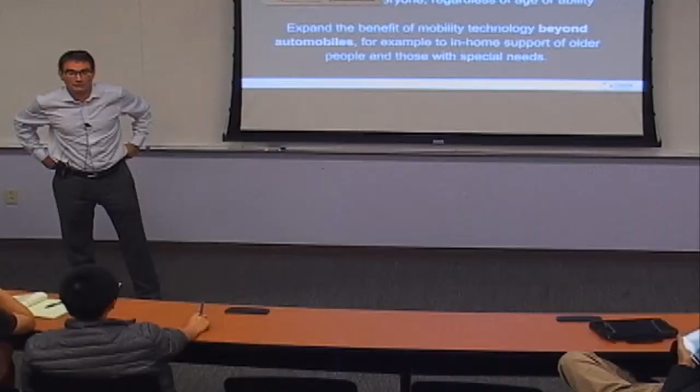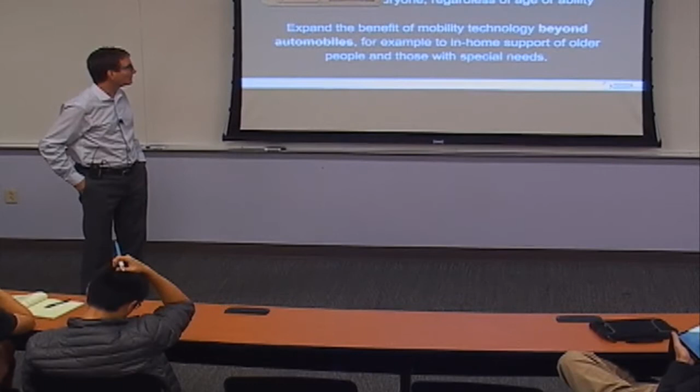We've already talked in many of our public presentations about what we're doing with driving. I'll give a tiny summary of that - it's kind of already out there. Gill Pratt and James Kuffner have done a great job of spreading the word. And we have not talked publicly about our robotics work until last Saturday, so I'm very pleased to come out here at Berkeley. This is not widely known yet.

Do I have a chart about TRI's history? Not really. That's the mission. We were funded with $1 billion, 10 to the 9th, for 5 years. And the goal was to become the DARPA of Toyota.

DARPA, the Defense Advanced Research Projects Agency, has been extremely successful through 5 decades now of being revolutionary and disruptive. DARPA brought us the Saturn V rocket, which took us to the moon, and GPS. My particular part when I was a DARPA program manager was the robots used to defuse roadside bombs in Afghanistan and Iraq, the PackBot and the Talon. What else has DARPA done? Well, most recently the DARPA Robotics Challenge was motivated by the Fukushima incident in Japan. And the internet was the ARPANET and the DARPANET before it was the internet. There's also the very fancy prosthetic arm that Colonel Ling did.

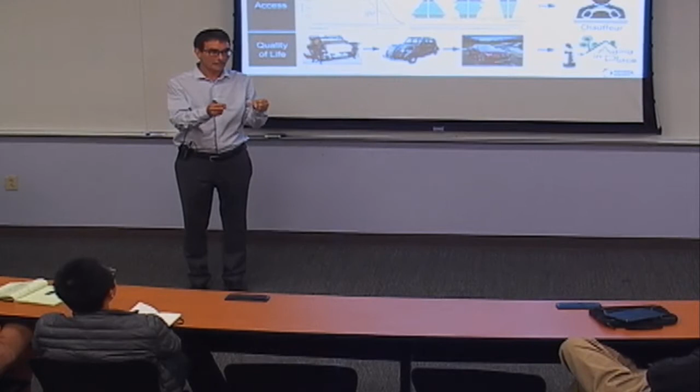Safety: lots and lots of casualties and deaths due to accidents. We have one main approach here, iconized as Guardian. In Guardian, the idea is that the person drives, and there's a system watching, like your guardian angel, watching over your shoulder. If you're about to do something dumb or dangerous, it will warn you.

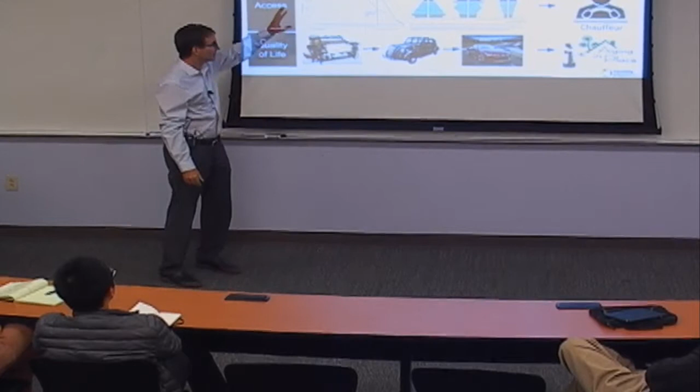And if you're really about to do something dumb, it will take over and help you and save you. The other approach, called Chauffeur, is what you classically think of as a self-driving car. You're reading the paper with your hands behind your head, maybe not paying attention, and the car is driving itself.

So there's a strong motivation for that: allowing a system that can drive when you're disabled or older. An aging society is going to be a huge problem, first for Japan, then China, then United States and Europe. It's a wave that you can see coming.

1960, 2010, 2060. This side is male, this side female, and these are the numbers of people at different ages. You can see it's bulging where there are more and more. The greater proportion of society is old.

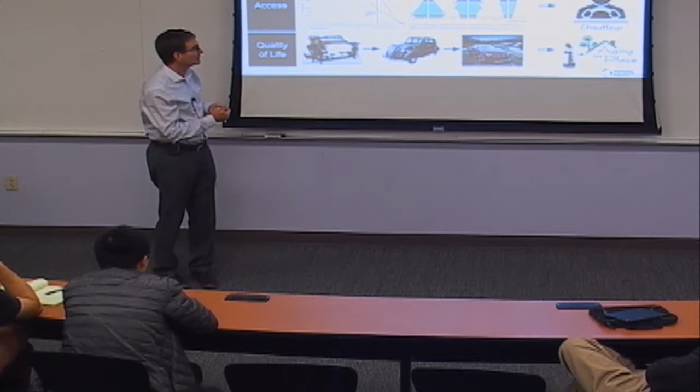These people are older and they're less able to move, but they don't have less of a need to move, right? They're not just going to stay where they are. So they're going to need transportation help, and Chauffeur is going to help meet that need. So safety, access—I'm going to talk about this more poetically in a slightly later chart.

Okay, this one's out of order. I already told you about the background here. So that's our CEO. I started in January of '16 as the chief operating officer, just getting the company up and running. Then we brought in a real professional from Lyft, who was their chief operating officer. And James Kuffner was a professor at CMU, then went to Google.

He's the person who coined the phrase cloud robotics. He went on to write the planner that did the Larry 1K, which was the first Google self-driving vehicle that drove 1,000 miles in the Bay Area.

And Kohaya-san is our liaison. 20% of our workforce is native Japanese, basically Toyota employees who are loaned to TRI. This is our transition path—how we get the technology, our inventions, and our practices from the United States into big Toyota.

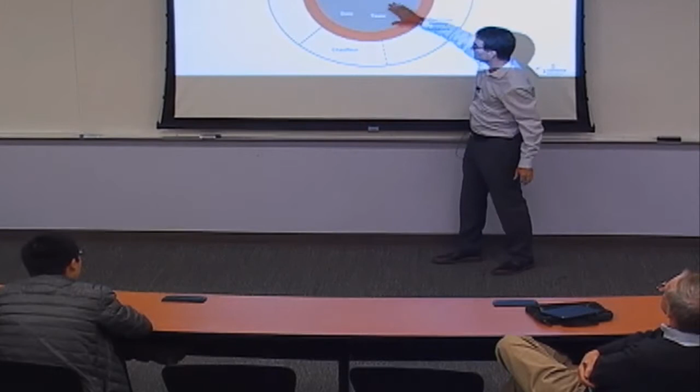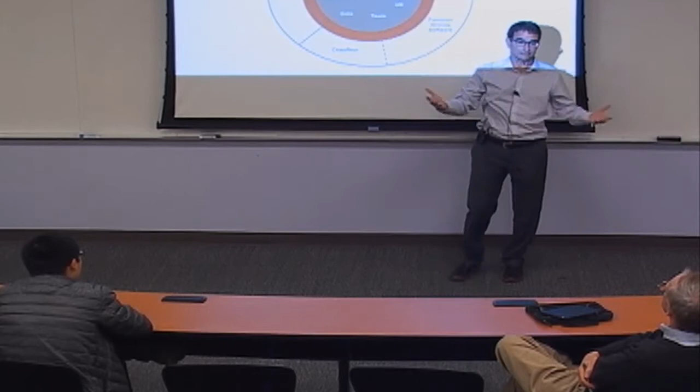What is the human in the car going to do? What is the human pedestrian going to do? All of this kind of prediction—that's all in this common core piece. I'm responsible for our robotics effort, our materials discovery effort, and this red thing, the university efforts at Stanford, Michigan, and MIT. There's some core technologies that are equally applicable to all of the application areas.

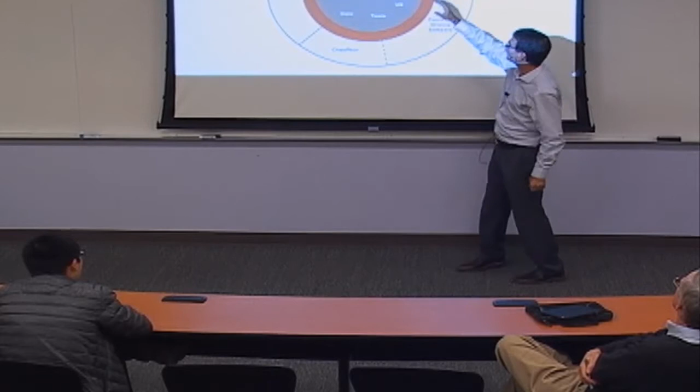James is responsible for those. For example, in learning, we're using learning in all three of the areas. So we have our own—I wouldn't call it basic research, it's not 6.1 research investigating basic principles—but we have a lot of people messing with learning systems, just trying to make them better, independent of applying them to driving, robotics, or materials.

That's a very unusual setup, but TRI is a little unusual, I think.

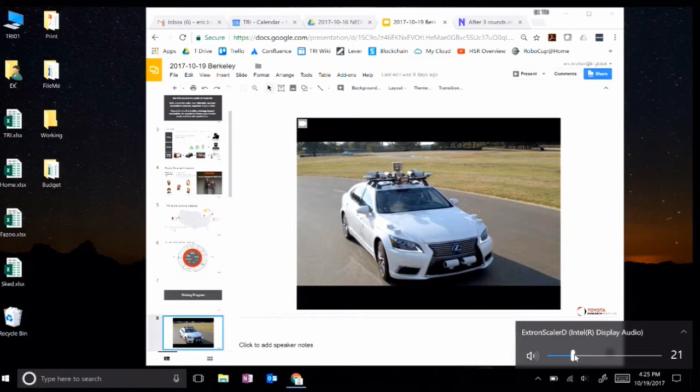Today you're going to see 4 different demonstrations. The first 2 of them are going to be in chauffeur mode. What chauffeur means is that the car drives for you. You would use a chauffeur car if you can't drive, for instance if you're disabled, if you don't want to drive, or if the traffic is very bad.

Can anyone still hear? I'm sorry to do that to you.

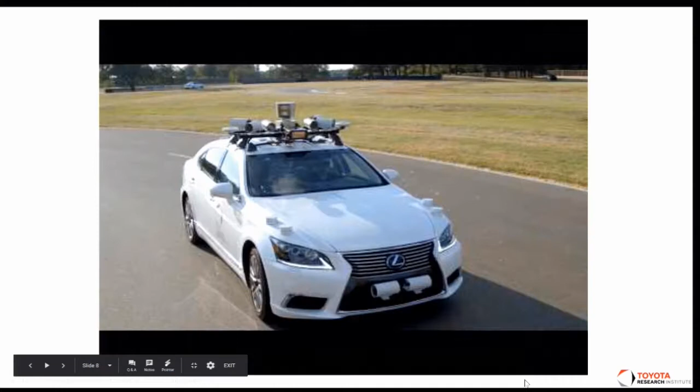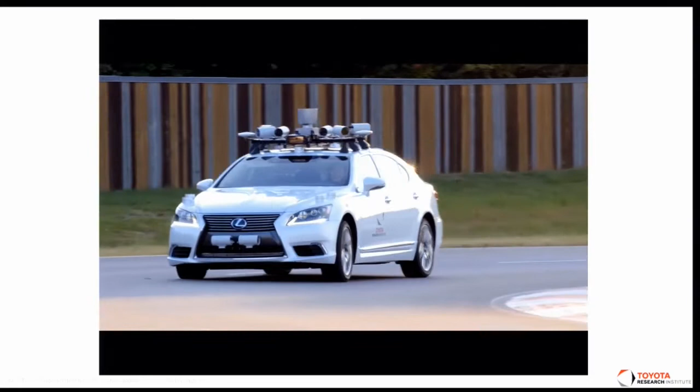Today you're going to see 4 different demonstrations. The first 2 of them are going to be in chauffeur mode. Oh, you're going to know the beginning of this by heart.

Today you're going to see 4 different demonstrations. The first 2 of them are going to be in chauffeur mode. What chauffeur means is that the car drives for you. You would use a chauffeur car if you can't drive, for instance if you're disabled, if you don't want to drive, if the traffic is very bad, or if you're taking a taxi cab ride, like mobility as a service.

The other 2 demonstrations are going to be in Guardian mode. This is for people who want to drive. It's a safety net against having a crash. We have designed a special test car which has dual steering wheels, dual brakes, and dual accelerators.

The reason for this is that we need two different personnel in the front of the car. One is a safety driver, the other is a test driver. They are there to interact with the car as if they're the actual driver in a production car. But for our development, this is a tremendous advance because it lets us test the Guardian system with an actual test driver while still having a safety driver there just in case.

We're going to start off with the chauffeur mode of the car, where the car is going to be doing all the driving for us. So you can basically sit back, relax, and enjoy the ride.

All right, you ready, Sharon? Yes, I'm ready. Are you ready, Aaron? I'm ready. Okay, here we go.

One of the real world things that we have to handle in self-driving mode is all the randomness that occurs every day. In this lab, we're recreating a scenario where a pickup truck has driven along the track and dumped some hay bales out of the back randomly. What you're going to see is our car senses, does a safe lane change, senses the next one, and then changes back. Very smooth.

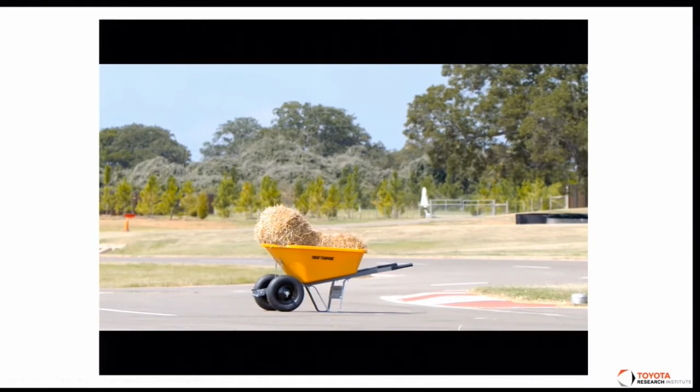And now Guardian has stepped in, it's driving the car for you, and now it will offer at some point to give it back to you. Why don't you go ahead and take it now.

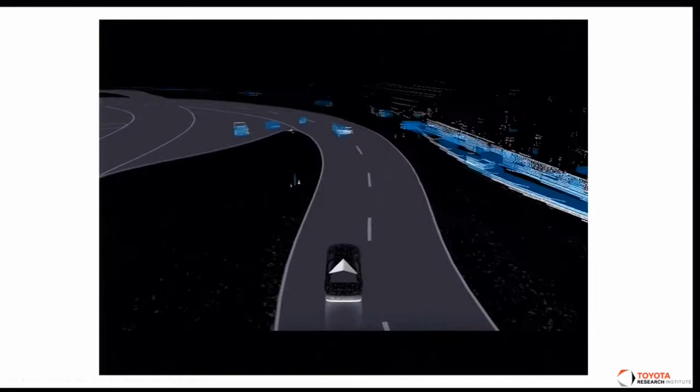One of the most frightening things that can happen on the highway is when a car in front of you switches lanes to avoid debris. You have very little time to react because your view is blocked by the car in front of you. We have sensors that can see significantly better than a human driver can see. The Guardian is going to take over where a car switches lanes in front of us in order to avoid debris. Here that car switches lanes, Guardian decides we have to switch lanes also, and we avoid having a crash.

Now Guardian has offered to hand back control, and Ryan has taken control back of the car. So today you've seen demonstrations of two basic technologies that the Toyota Research Institute is doing research on. This is all part of TRI's work to eventually build a car that can never be responsible for a crash, regardless of what the driver does.

So we did all of that a couple of weeks ago, and Akio Toyoda, the president and CEO, was one of the guys on the second steering wheel. All of our board of directors and biggest investors all had a chance to do it. So I'm happy to.

This is at the Gazoo closed course in Texas.

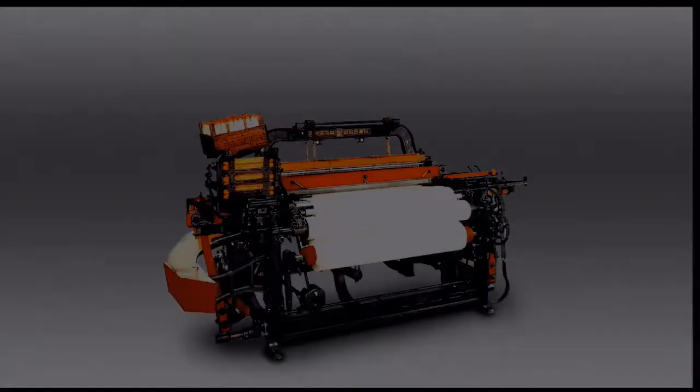So, gulp, this is getting real. 10 million cars a year. The way you usually launch things is you put it in your flagship car, for us the Lexus, that's sort of the premium thing. And then a few years later it gets into the Camry, and a few years after that it comes into the Corolla. So it's not 10 million right away, but that's our charter.

So that's kind of a snapshot of what's been going on. Let me focus now on robotics, which is something that I'm more directly involved with.

Toyota started as a textile machinery company. It made looms, they were the best looms. They were able to sense when it dropped a stitch. Other looms would make an error and then keep going, and then you're done - you look at it and say, I dropped a stitch. And the Toyota loom would detect it and stop, and someone would run out, fix it, and then start it all up again.

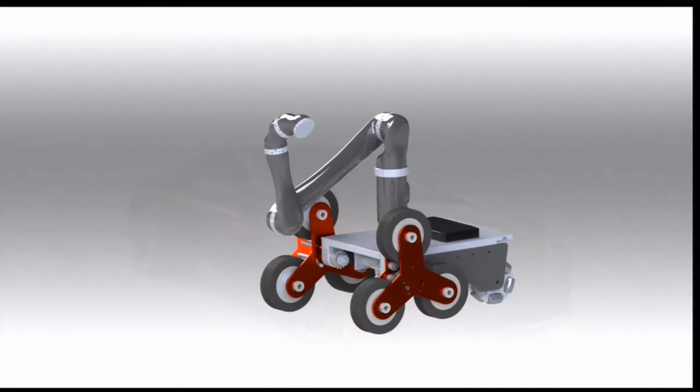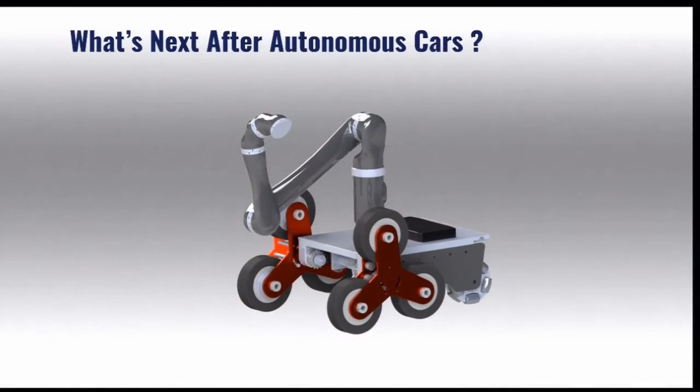And the question that TRI - that's all TMC - it seems likely that we're going to sell fewer cars in the future with mobility as a service and ride sharing and an aging society, less people buying and owning cars. So what's Toyota going to do? What's the next pivot? We went from textile to car to robots is what TRI's hypothesis is, and we're working to make it possible for Toyota. It seems like every generation of the Toyota family wants the company to pivot a little bit. So this would be the legacy for Akio Toyoda.

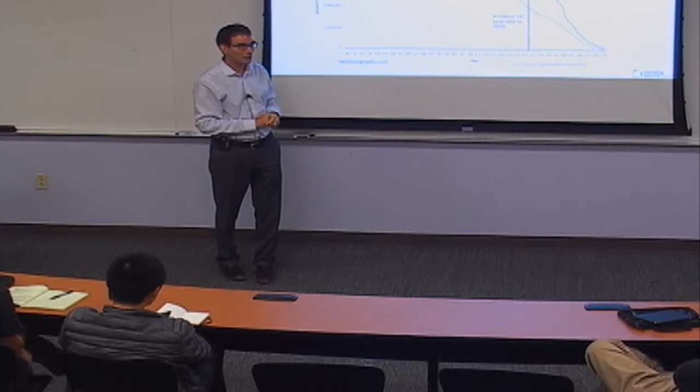And we want to get our cars out in a few years, 2020. The robotics can wait a little longer. This crisis is slowly happening, but we have a little more time. And I think it's more like a 5 to 10 year horizon is when I would like to be able to stick my finger in the dike and hold back the flood of aging a little bit.

One of the key approaches we have for doing this is simulation. Google and Berkeley's Sergey Levine has his arm farm - well, we've got a virtual arm farm. And what TRI has is the world's best simulator now, called Drake. It's open source. We haven't officially launched it yet.

All these robots are exactly the same robot doing exactly the same task, picking up that blue thing. They drop it, it goes into some random orientation, they try to pick it up again. This is running up in the cloud, lots and lots of robots, many, many samples, and we then study the errors and the distributions, find the statistics of the failure distributions. Then you know what's going wrong, you fix that problem, and then try it on physical robots.

A physical robot is never exactly the same as the simulated one. Update your models from the physical robots and plug that back in. Every time, we have a real modern software approach to this, so that when you find a problem - it wasn't able to pick up the blue funnel thing in such and such orientation and starting configuration - then we put that into the testing. When we do our continuous integration, we build our software every night, and it's got to pass that test before we promote that software to our master branch.

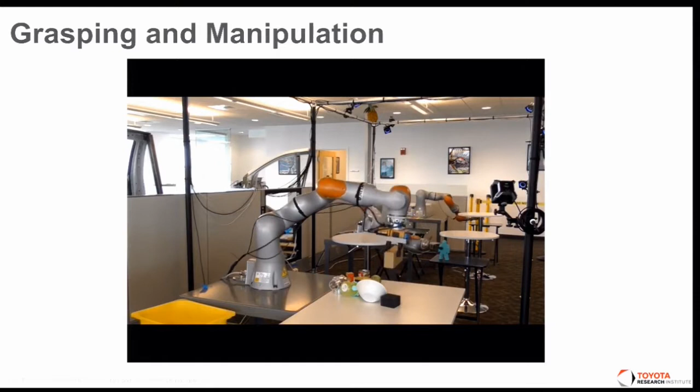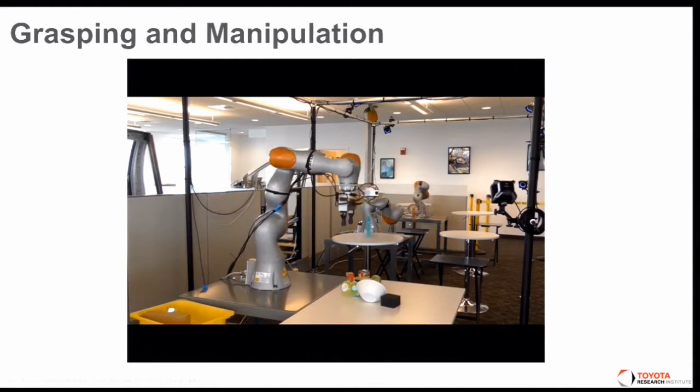So we're not just doing things in simulation - here is our new facility in Cambridge. I saw some demonstrations here similar to this. This robot in the foreground has an RGBD sensor. It does a pass like that over the pile. It doesn't have any models, doesn't know any of those objects. It just makes a point cloud, segments the point cloud, finds something on top, and then tries to approach it and pick it up. It doesn't always work, and it doesn't always put it in the yellow bucket the way it should.

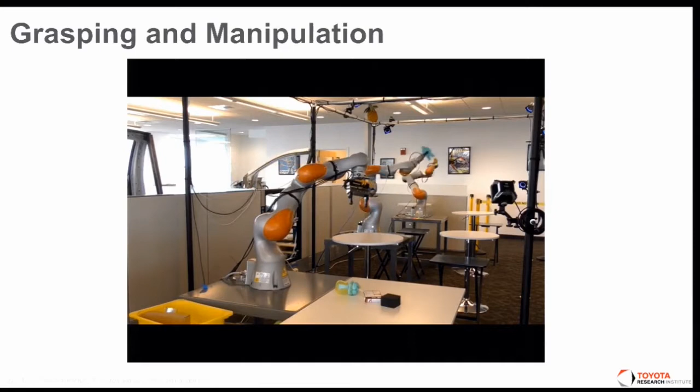Are you guys emotionally against models? Not at all - this uses models of the robot, but it doesn't require models of the object. We're not against it in principle. We've scanned all those objects, and we also have systems that try to do the point cloud and segment out specific objects, recognize them, and then it's object 14 - I know that behavior 37 is the one I should use for that object.

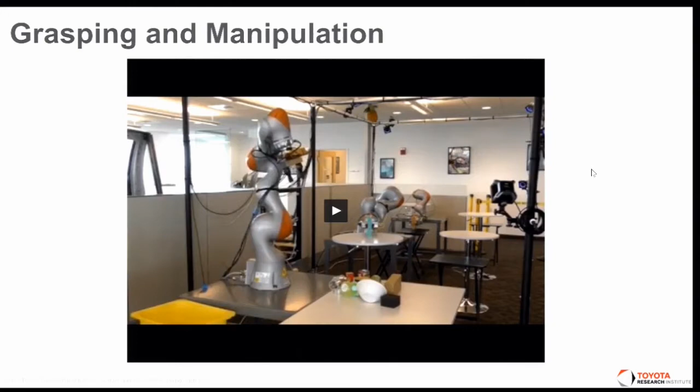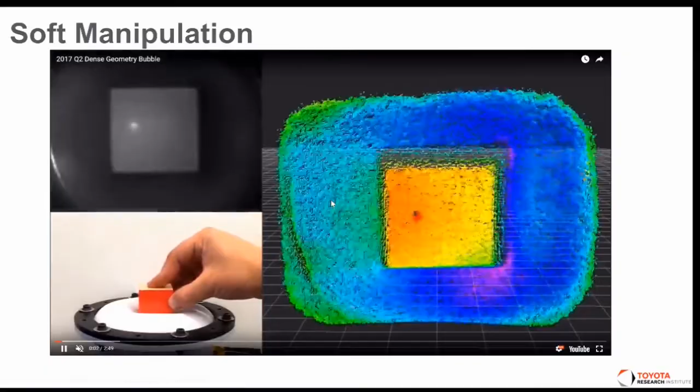Ken Goldberg, I'm sure he showed you, he has this big cloud, and the robots in back here were doing pick and place - so the simulation and reality together. That's not the one - that's not what I thought I was going to show, but here it is.

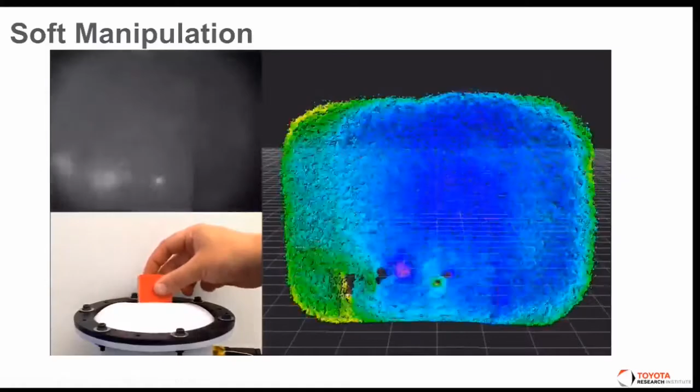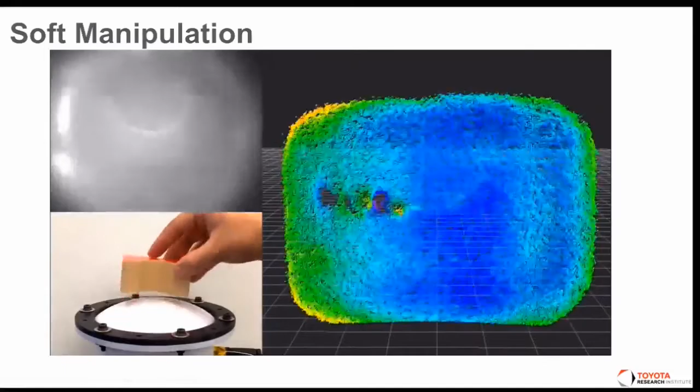We're also doing research on soft sensors. So this is a foamy piece of plastic. There's a range sensor underneath it looking up, and here is the image that it has, and we're able to analyze that and find the shape and the orientation of that object.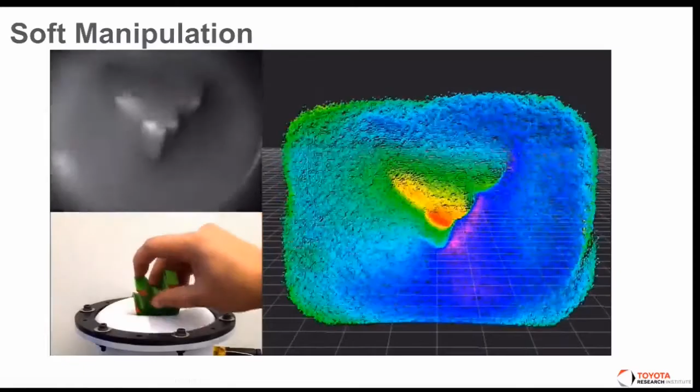Caroline, did you show him what you have? We have similar systems. Good - ours is better. I am sure, because we do it on $5,000. You are doing it on $50,000. That's a big difference.

Yeah, she had a chance to see this herself when she came to RSS in Cambridge. I didn't get to see it. I read too late. Oh, okay. It's cool.

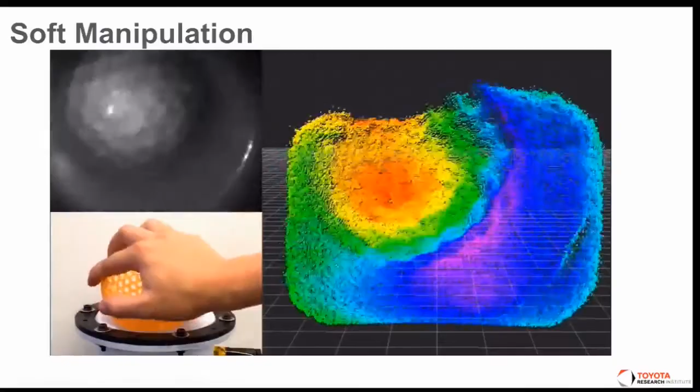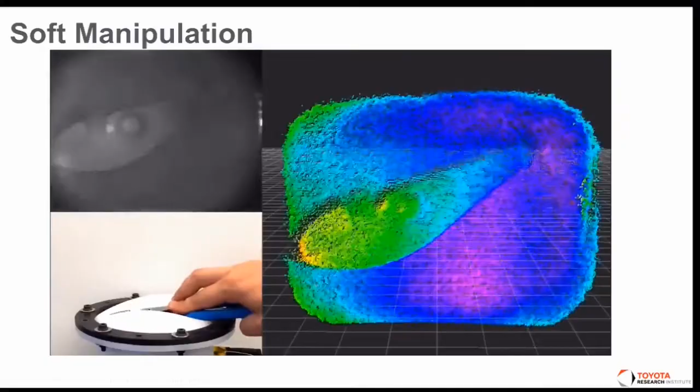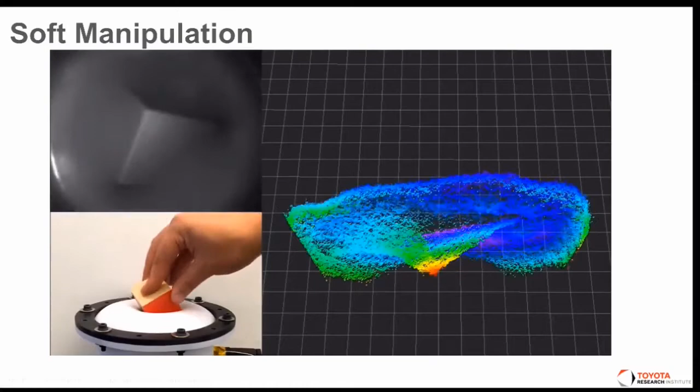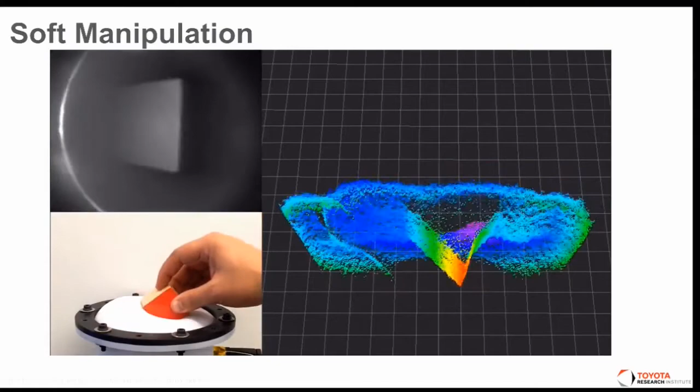The project now is to miniaturize that and put it on fingertips, and the sensing part of it. You can make very low-cost sensors like that, but the minimum range is the limitation - they all have an offset of centimeters, and that's not going to work in the fingertip. Ultimately, we want to cover the whole body with that kind of skin and be able to blindly touch, bump into things, be aware of them, and not have that be an error condition. It's just another way to interact with the object.

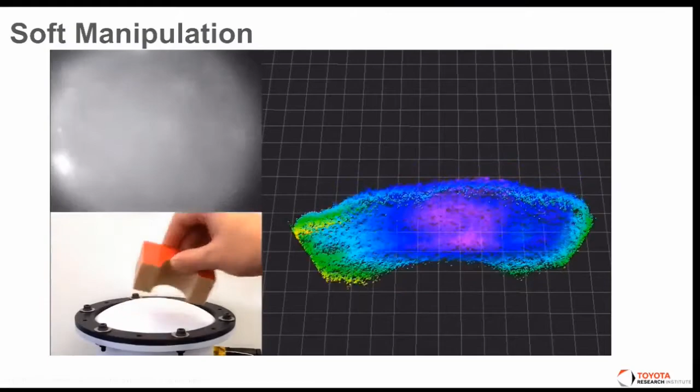So there's a group of maybe 3 people in our Cambridge office developing these sensors and working in simulation, pretending that we have a small one and decorating the body and the arm and the torso with all of them, and figuring out how to close feedback loops around that.

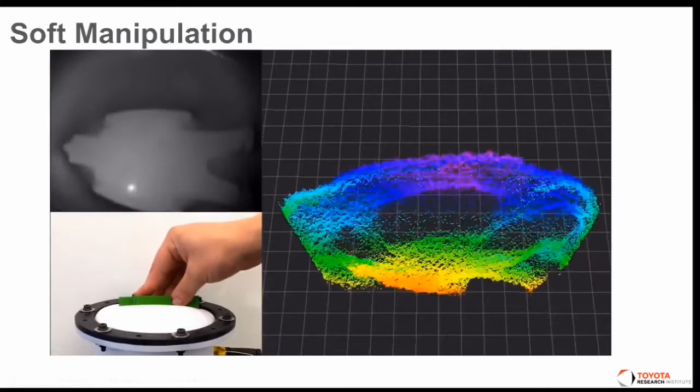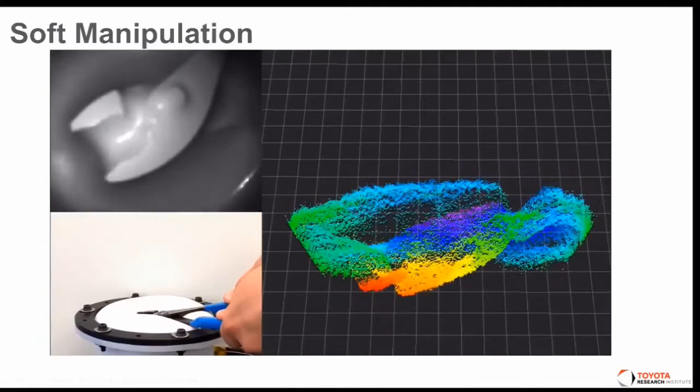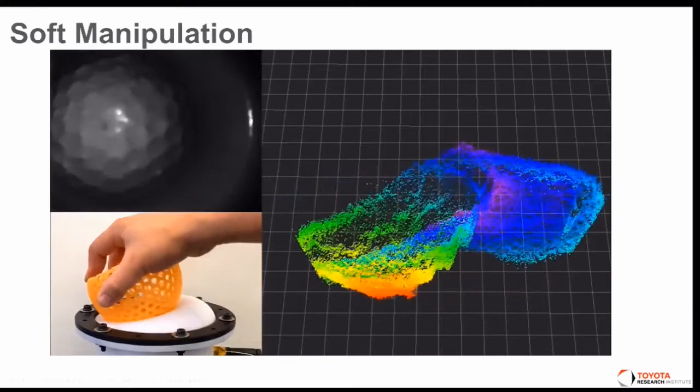It's not just tactile, right? It's really dense geometry that we're getting out of this - not just a few points of tactile. In a sense, you get the whole pressure distribution, the forces spread over the entire contact area. And it's not obvious how to use that in grasping and manipulation - it's a much higher dimensional feedback loop.

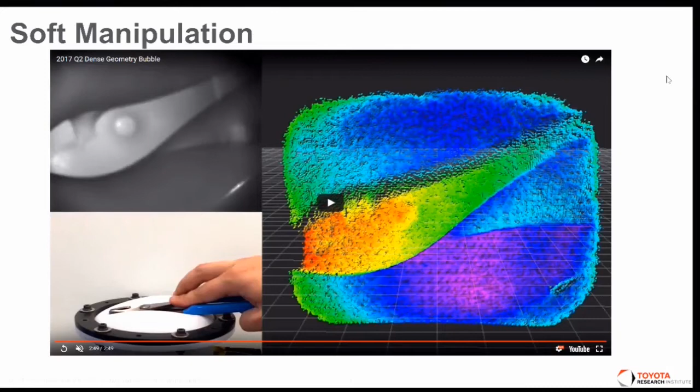I cannot resist to say, you remember the Toulouse finger? Ideas were there, I'm talking about folks in the 70s, and Eric actually spent some time in Toulouse working with these people. We had this, I hate to say this, it was called the French finger, but it looked like a penis. Unmistakable.

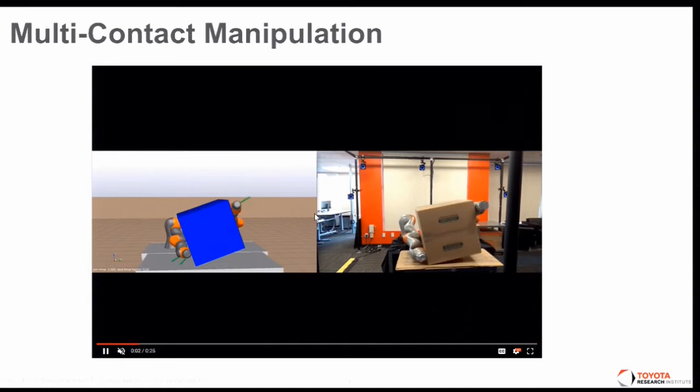Here's another case where usually when the rest of your hand or arm hits something, that's an error. Here's the simulation in Drake, and here's reality, with the guy walking by to show it's all in real time. You'll notice very good agreement between the simulation and the physical manipulation, and you can see the little force vectors coming out. I'll play it again since it's short.

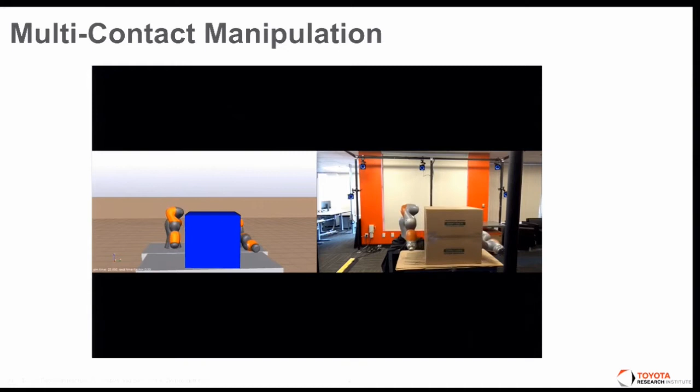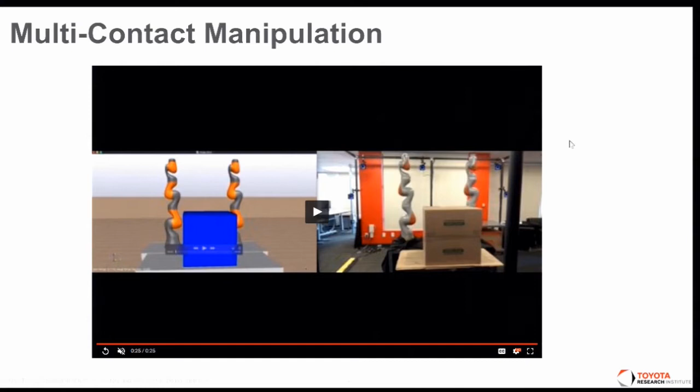The idea of whole body manipulation and multiple contacts, we relish that now. It's not something to be avoided, and actually the more contact you have, the more stable the entire system can be, and you can sort of hug things. This is a direction, and for interacting with people in the home, we think this is going to be very important.

Another area we're researching is manufacturing. I've been to many car manufacturing plants, and we looked at what people were doing and how we could help them be more effective and safer. Assembly seemed the most promising, so we're now applying robots to help assemble different pieces of the car.

Here's two guys putting this rubber weather strip into a window frame. You have to hold it up there and scoot your fingers in, like this. It's kind of an awkward thing to do, and it takes two people with two arms each.

There are lots of ways to cheat this, which we've been having fun exploring, like heating the weather strip and letting the elasticity of the material work for you, so you don't have to push it up and wedge it in as hard. It kind of naturally does that, and as it cools, it sets in place.

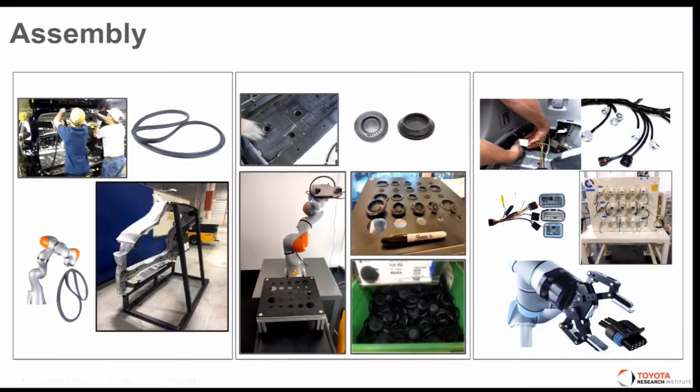We're coming up with different end effectors, like something that vibrates it into place instead of doing what a person would do. Another problem: when you manufacture the chassis, there are holes you have to plug up, otherwise water gets in. So we've made a fixture and now have the robot plugging the plugs in. Some holes are very hard to reach, which makes it awkward and causes back and thumb injuries.

Cable harnesses are also a huge problem, very awkward, and there's lots of them. Mating a plug and a receptacle sounds very simple, but it's a lot harder than plugging into a 3-prong outlet. So those are some of the manufacturing tasks we're taking on.

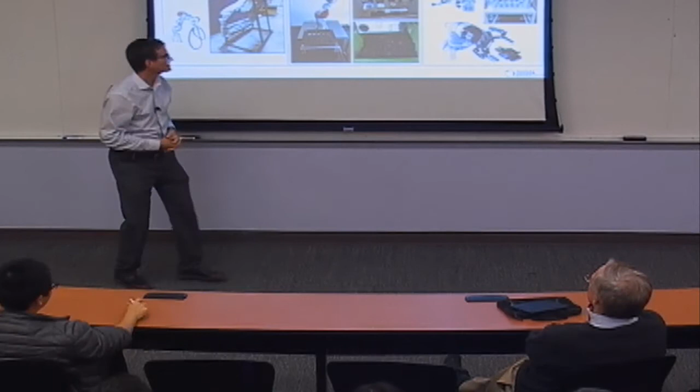If this is a bar chart, home is like this and factory is like this - this is a much bigger problem, and we're putting more of our resources on it. Assembly is kind of like, we can't be part of a car company and not do something for car manufacturing.

That's what I wanted to tell you about our robotics program, and I'm going to switch now to talk about the university program just a tiny bit.

So those are the three institutions. We have something like 45 projects, probably 50 or 60 faculty PIs, and 100 or more grad students and postdocs working on projects. For each one, there is a TRI liaison who is essentially part of their lab, attending lab meetings. At our next big workshop meeting, where all three universities get together with us, we're going to make our TRI people give the PI's talk - we'll see how that goes. And the papers are starting to just pour out.

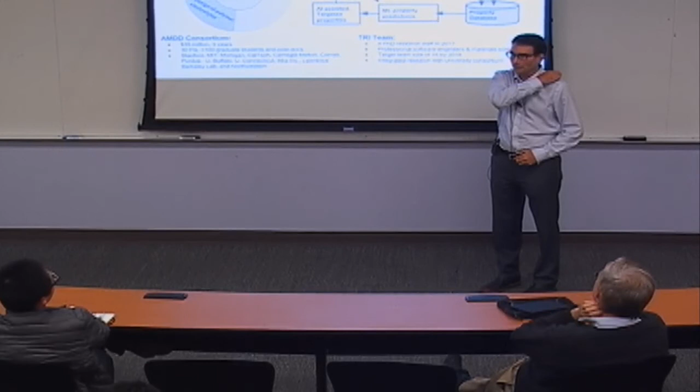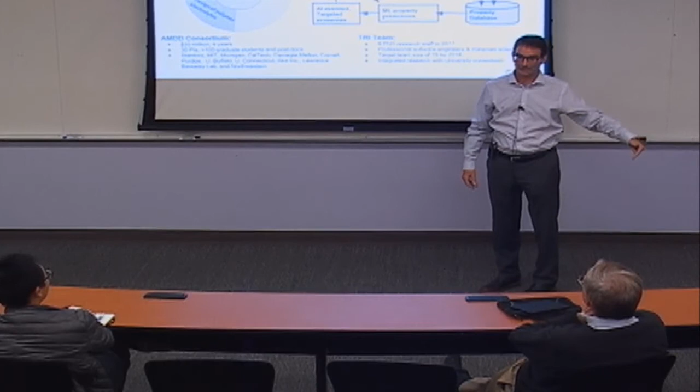I don't think the chauffeur and guardian framework applies that well to a home robot. There is sort of a layer of supervisory control. You could imagine I'm your home robot and you've asked me to put away the groceries, and I'm starting to do that. The rest of the house has a network of sensors and recognizes - the robot doesn't know it, but the house does - oh boy, the Cub Scouts troop is coming in, and they're all going for the kitchen because it's snack time. So robot, disappear, get out of their way. So there are higher levels of control that you could think of as like guardian, watching over the robot and alerting it to things that it's not aware of.

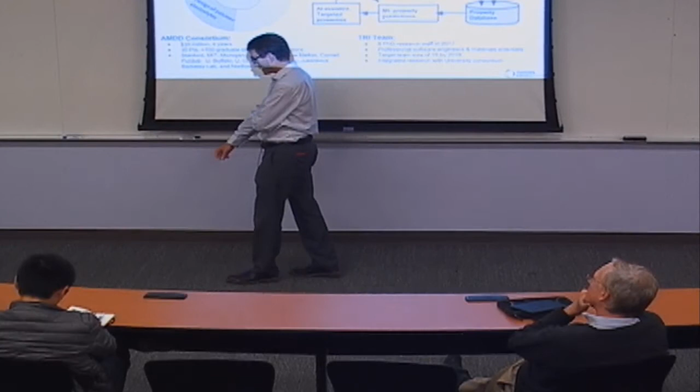Yeah, I don't think my question was really that those two paradigms apply particularly well to home robots. I was just curious whether you had any similar intuition for when these systems actually reach people's homes. There's this idea of Rosie the robot comes in and cleans up your house, and we have these cartoon versions of what that looks like. But I was curious whether you had any intuition for what those robots in their first iteration would actually start to look like, what tasks they'd be able to handle, and whether there are any nice abstractions you could draw.

I can't talk about all the proprietary details, but the activities of daily living—bathing, toileting, grooming, dressing—is one thing people all over the world do. And the instrumental activities of daily living, where you use the telephone, computer, vacuum cleaner, blender, refrigerator, those instruments to get a job done. That's the class of task we think we could do in a few years with modern robot technology, and manipulation is a key part of that. We're not going to get into the conversational agent, a better Siri or Google Home or Alexa. They're doing great, and we need that. But things that can really do work, applying forces and torques on the environment, I think is where we're really headed.

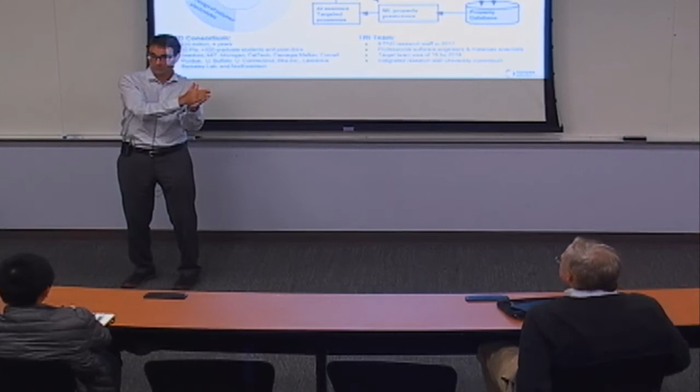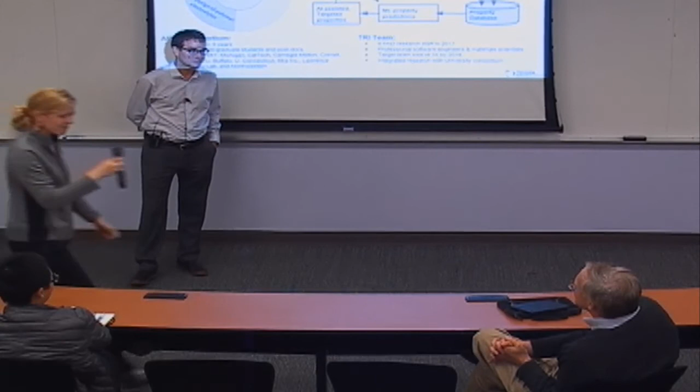I'd go highway teammate rather than urban teammate. I'm advocating this—this is just Eric's view, don't say this is Toyota's plan. Eric's idea is we would have the home teammate in the late 2020s.

There was a question. Thanks very much. Can I ask why that type of gripper? It doesn't seem like it's going to be well suited for the home—I'm going to have trouble with a doorknob, for example.

Yeah, the parallel jaw gripper, right. We have families of grippers. These are just the simplest ones that were already instrumented with the iiwa arms we were using. There's the Robotiq 3-fingered one, and an old iRobot design. So we're using them, just not shown in the video. And we're not going after suction.

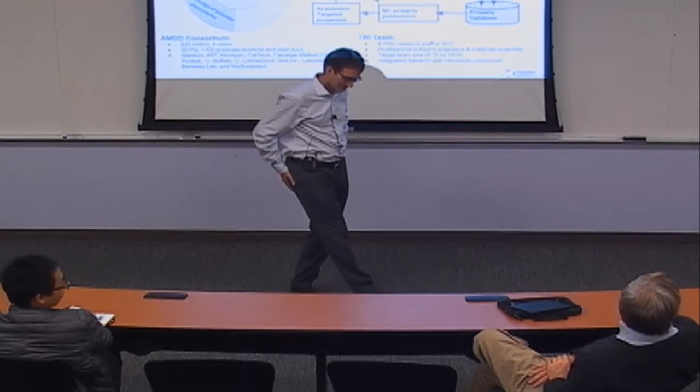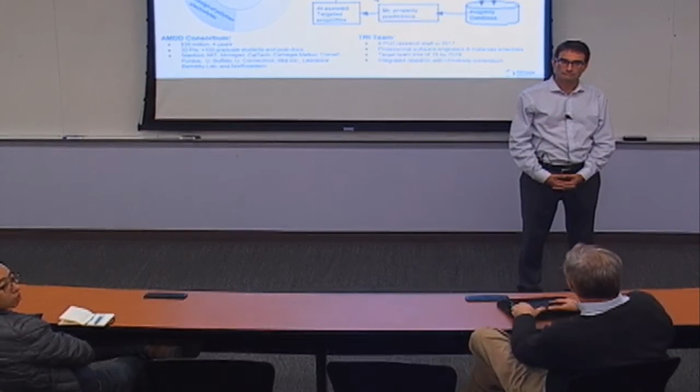Airlines have been automating as well, and I guess a big paradigm there compared to Guardian—the airplane does the easy stuff, and the pilot takes over if there's a crisis. You're doing the opposite with Guardian. Can you comment on that, or why one might work better in the car than in the airplane?

Well, I think there isn't really a Guardian function in aviation. The autopilot is basically the chauffeur function, and when things go crazy it says help, and the pilot has to take over—that's the handoff problem. There have been lots of studies of that: when the pilot's not paying attention, you're about to stall, and you don't know all the environmental variables, the pilots jump in and they have to do something. They're not ready to do it, and they make big mistakes. I don't think the airline systems have a Guardian-like function. That might be a good thing to add. The pilot is the Guardian.

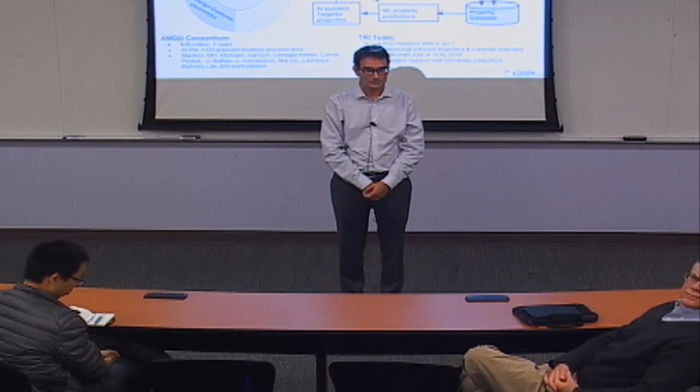At least from the examples you presented, I got the impression that the current emphasis may be industrial robot utilization for Toyota, and maybe a sign that Toyota is frustrated by robot manufacturers not solving their problems. Is that a good observation, or not really?

I certainly cannot speak for the Toyota Motor Company. I did show industrial arms, but that's because they're very easy to use, and we can get our experimentation going rapidly. We don't expect those arms to really be used in a home—those arms cost $100,000. We think something like $1,000 would be a target for a 7 degree of freedom arm, roughly $100 per degree of freedom. So we are definitely focused on the home, and those videos with industrial arms don't give the right impression.

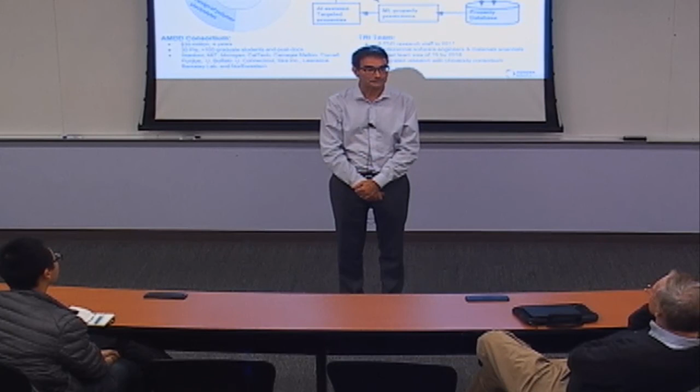When I visited the Toyota plants in Kentucky, Ontario, and Takaoka, I talked with many people in management, on the floor, in the supply chain, and everyone was enthusiastic about robots. No one thought it would take their job or that something's wrong with existing robots. They wanted more, and everybody's focused on quality, safety, and fewer injuries—getting robots to do things that cause people to hurt their back or thumb. So they were very enthusiastic. I hope that answered your question.